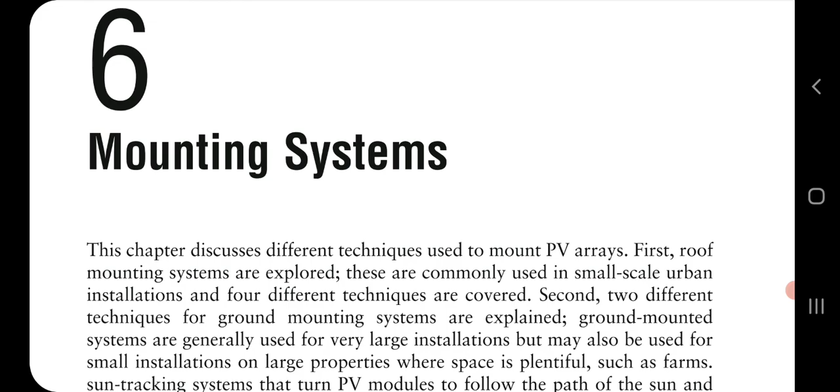The first mounting system is the roof mounting system. In the roof mounting system, particularly in houses or small buildings, or maybe some bigger buildings also, it is mounted on the roof.

The second is the ground mounted system, where the installation of a PV array is in large areas, like fields, on the ground, or at a farmhouse.

So the installation should be done well, because the power efficiency is affected due to the installation or improper mounting. You have to suitably check which is the best option, and also consider the safety issues around that. There are many things to consider, so the local installation conditions have to be taken into account.

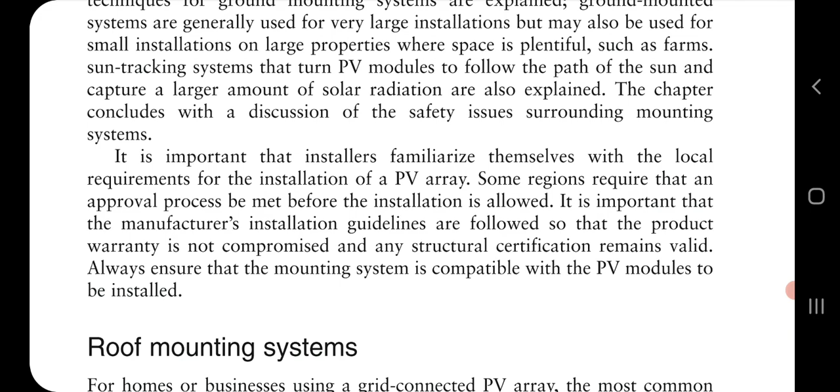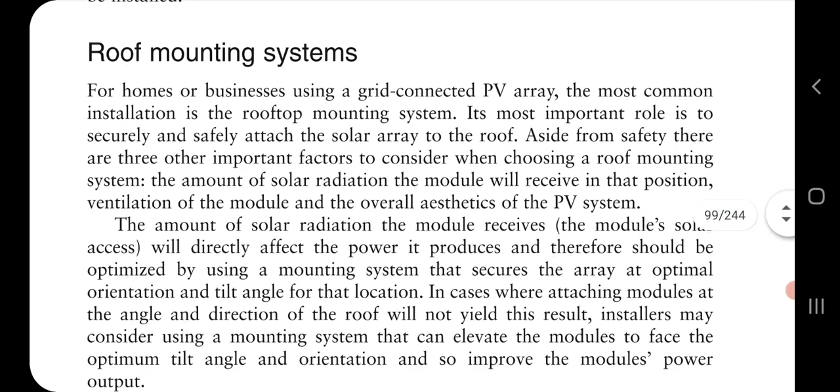We have to consider the specification or manual given by the vendor, and check which installation can be done, whether it is roof mounted or ground mounted. In this roof mounting system, it particularly happens in houses or small businesses where the building is used for installation.

But a lot of care has to be taken when you install the PV arrays above the roof. You have to see that the gap between the roof and the PV module should be more, because when heat falls on the PV arrays or module, it also generates heat, and the temperature nearby that area increases.

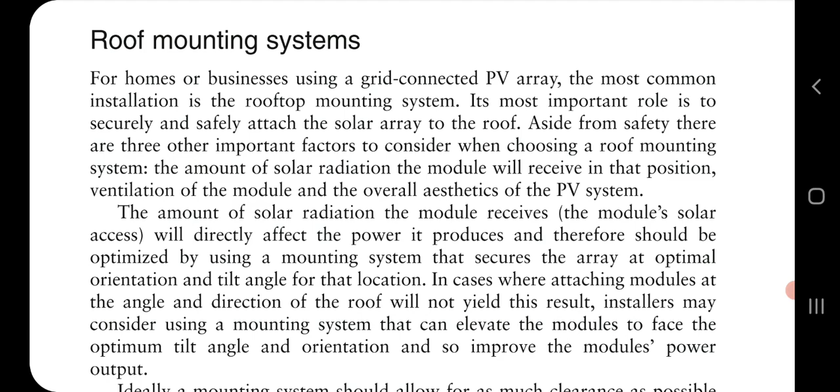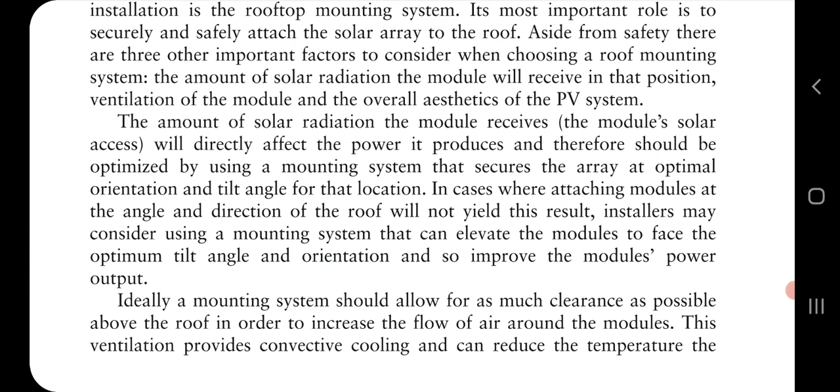So when the temperature increases, the power efficiency decreases. If there is proper or good ventilation, and air is flowing and removing the heat, then the efficiency increases. There are many methods for doing this, and the installation guide or manual should be considered.

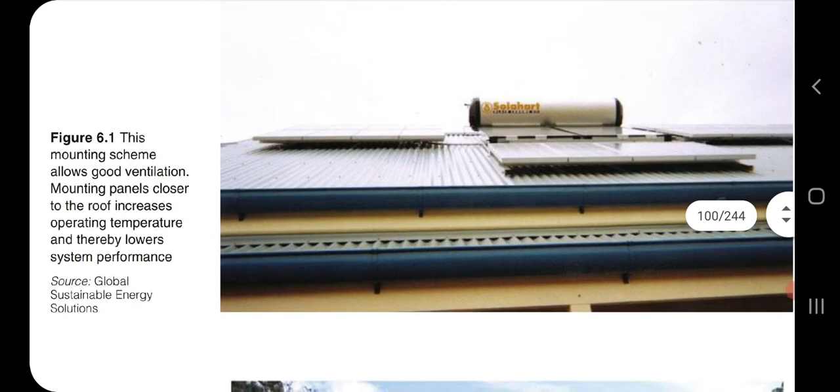Now, if you see this diagram, this shows good ventilation. Air can pass through the modules, and when air passes through the module, it removes the heat, so the efficiency increases and the life of the PV module also increases.

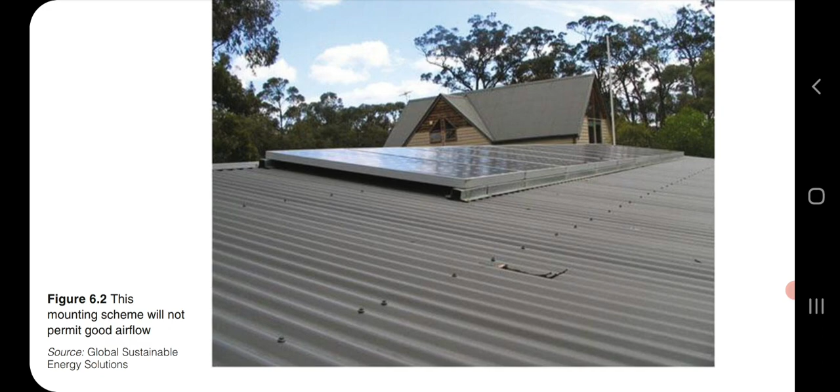But if you see here, it is quite different. This mounting scheme does not permit the flow of air, so it damages the life of the PV modules and decreases its efficiency. So it has to be installed properly, such that ventilation is present, heat is removed, and thus it increases the total performance.

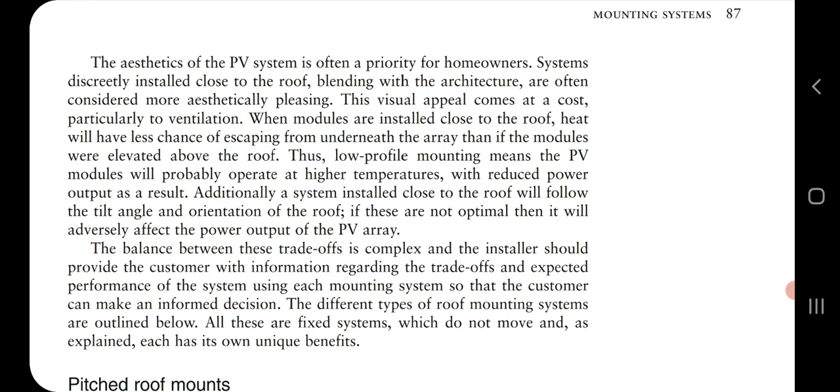Another method shown here is the pitch roof mounting. In this pitch roof mounting, the PV module or array is installed above the roof. It is easy and relatively inexpensive, with the attachment done above the roof, and there are many methods for this.

A horizontal railing system is used, along with a bracket, and the module is placed on the railing using a module clamp. By using this module clamp, the PV module will be above the roof level.

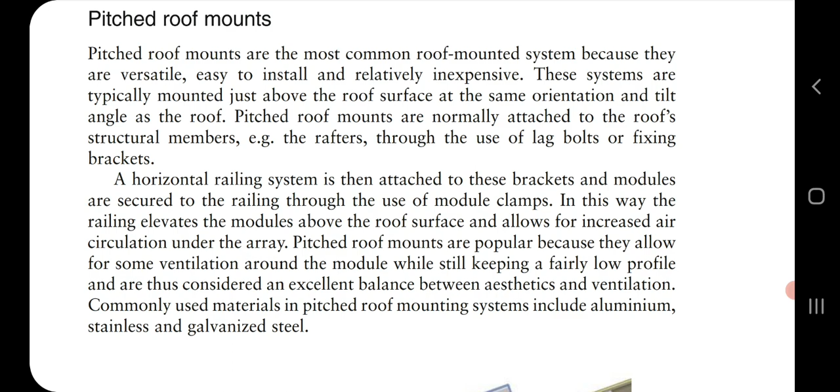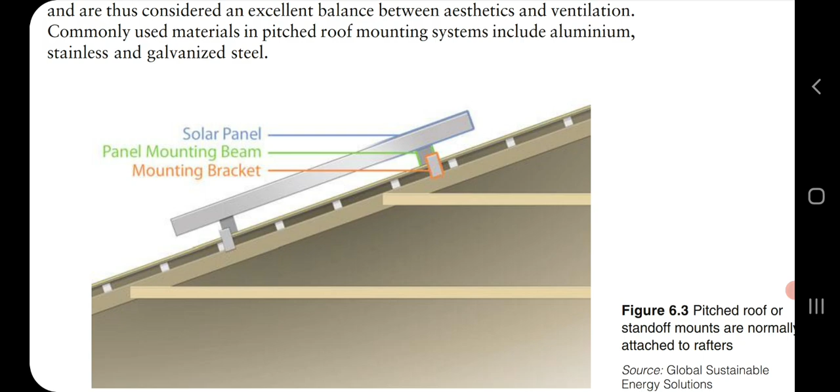You can see this one in this method - it will be above the roof level. When it goes above the roof level, air can easily pass through the solar panel, providing ventilation and allowing air to flow through the panel, which removes the heat. This is a very useful method.

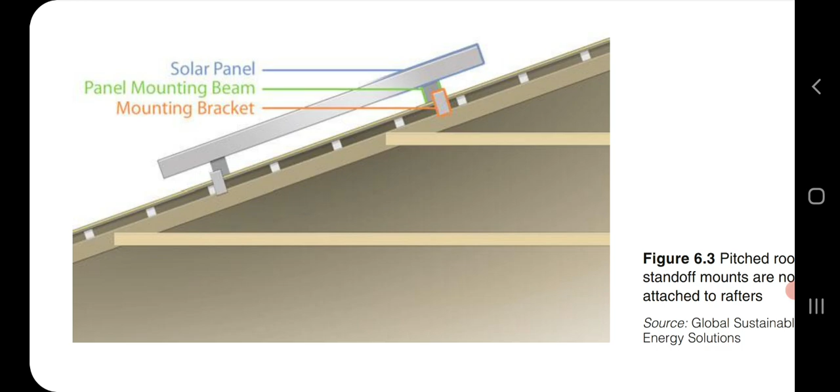You can see this panel here - above the railing, the module clamping is done, and you can see the gap between the roof and the panel. This is another method, using a clamp - a module clamp - above which the panel is installed.

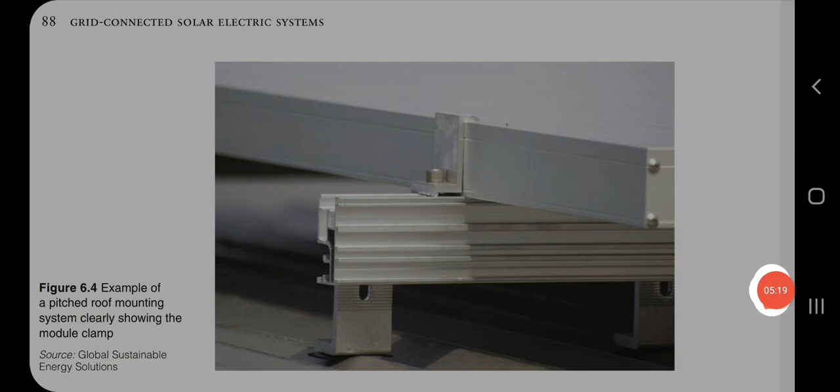In this one, pitch roof mounting for tilted roof. You see there are different types of roofs. One is a flat roof or horizontal roof, some roofs are tilted, some are metal type. So different roofs are there, and the installation becomes very difficult because the PV module installation panel will be same for everyone, but the accessories used to install it go on changing, or it depends upon the manufacturer. It varies in design and connecting.

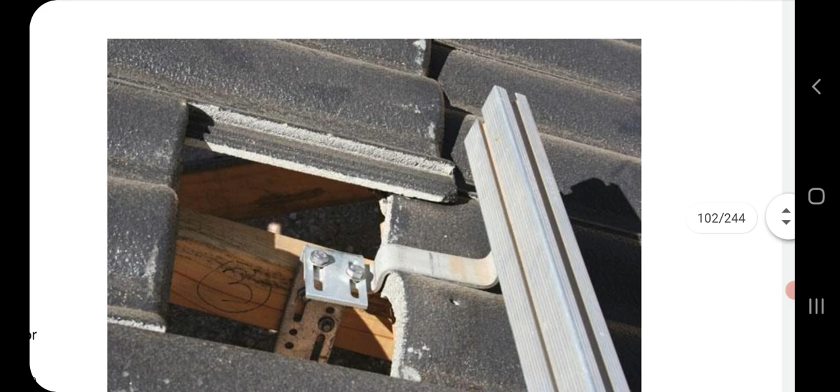For example, if you see this one particularly tilted, this is a complete tilted roof. For the tilted roof, a different type of accessories or modules are used which can be fixed. We have to see that when we are installing, particularly the tiles above the roof should not break, and it should be easily accessible.

Pitched roof mount for metal roof. When we have a metal roof, that time it is very important care should be taken. It is the most risky one. With a metal roof, when you are connecting, particularly the wire has to be taken care of. If any wire comes in contact with the metal roof, then it causes a lot of problems. So it has to be taken care of. The wire should not come in contact.

And when you are connecting two dissimilar metals or clamps of the PV arrays, and when you are installing on the roof, you should check that between the two dissimilar materials, something should be used that does not cause any corrosion. If corrosion happens, it damages the PV arrays as well as the roof. So corrosion should be avoided or prevented by using a rubber separator between the two dissimilar materials. When you use rubber between two dissimilar materials, corrosion can be avoided.

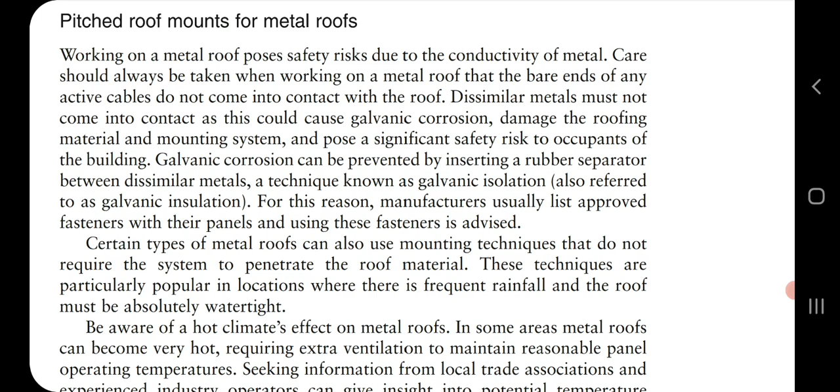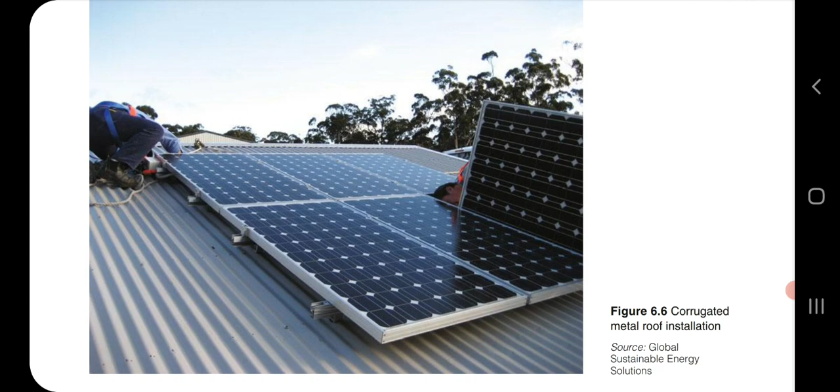You can see this one, if you are seeing this, the roof is a metal roof, and PV modules are installed above the metal roof. So a lot of precaution is taken between the clamps and the roof. Rubber is used to avoid corrosion.

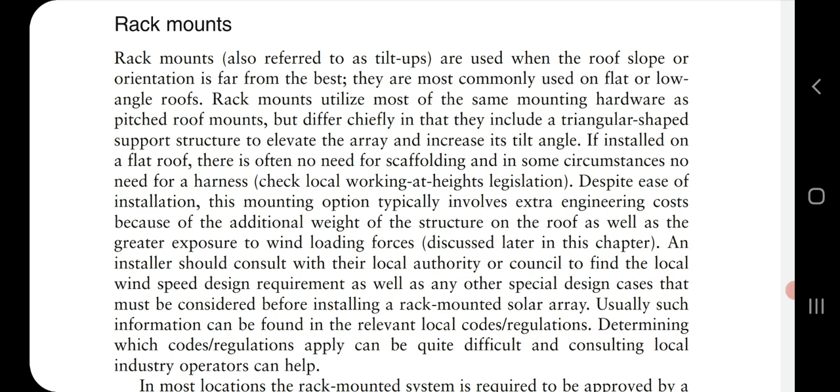The next is the rack mounted. It is very important. It is a triangular shape. If you can see this one, it is made up of a triangular shape. It is rack mounted, and here a separate arrangement has to be designed for the PV module.

In this one, what happens is this has to be very carefully done, and particularly the wind velocity has to be considered, because if the wind is more, it will remove the PV modules. So for designing this one, care has to be taken that wind velocity has to be properly studied, and it has to be designed accordingly.

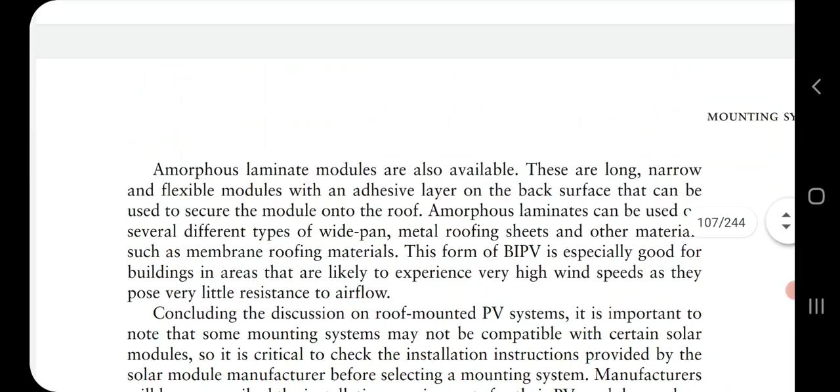The next method, which is very important and is now used daily as a technology everywhere in new systems, is the building integrated photovoltaic system. It is becoming very popular and is used by many buildings, designed in such a way that you can see this particularly as a building integrated system.

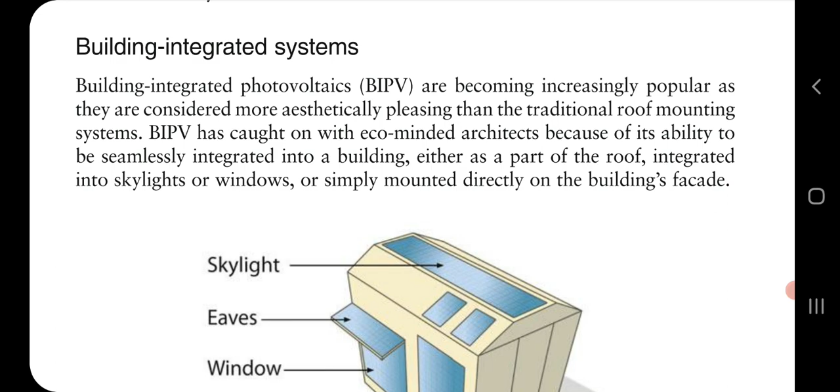In a building, particularly the roof is made up of solar arrays. The tiles you get for the roof consist of solar array tiles which are installed on the roof. Some are installed at the window panels, and some are installed at the door also. So they are integrating all these things into the building itself.

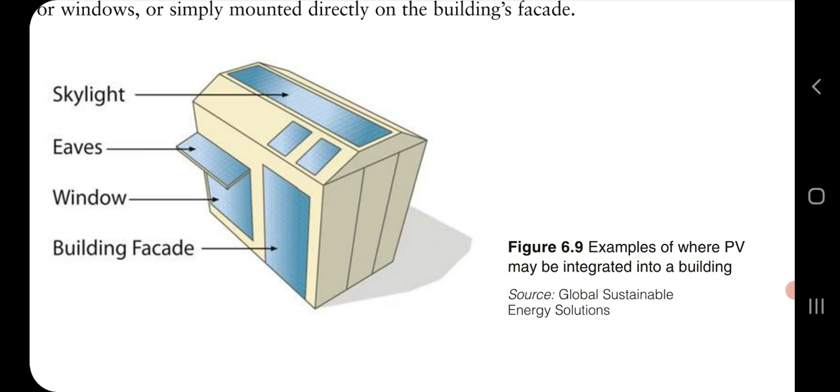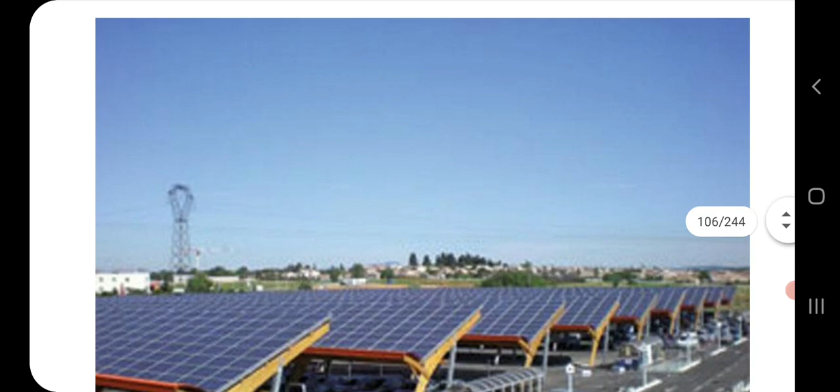So it is made up of tiles. If you can see this particularly, it is made up of tiles. Here you can see the roof, but this solar array is directly installed in the parking area.

And even here, these are the tiles, particularly solar tiles on the complete roof, placed above on the roof side. So there's no problem for ventilation, and any wind-causing problem is also reduced.

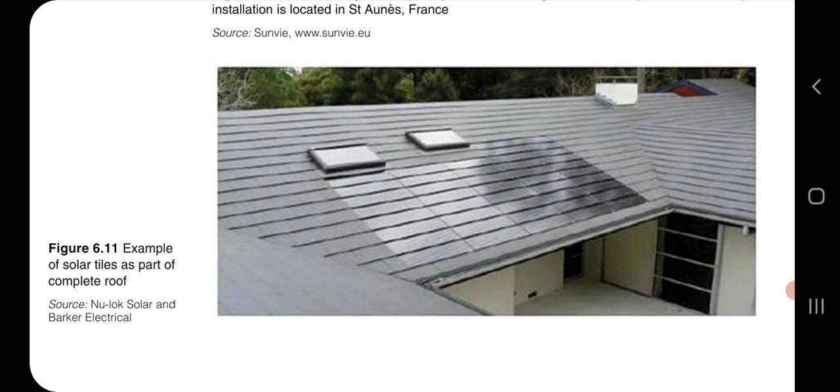Here also you can see tiles lamination, called amorphous laminating, installed on metal roofing. That time the roof is installed properly. That tile is amorphous, made up of one material, coming in the tile itself. No need of putting a slab - if you put that one, it starts producing and generating electricity.

Ground mounting system is very important, and it is used where there is plenty of land available. It is used for large production also. One advantage is there: when you place it on the ground, you get a lot of energy - more energy can be obtained from this if placed on the ground.

There is no requirement for tiltation also. If you directly place it on the ground, it absorbs the sun rays depending upon the movement of the sun, and easily absorbs the radiation. Whereas in the roof system, it is quite different tiltation, and the efficiency or power of the solar reduces there.

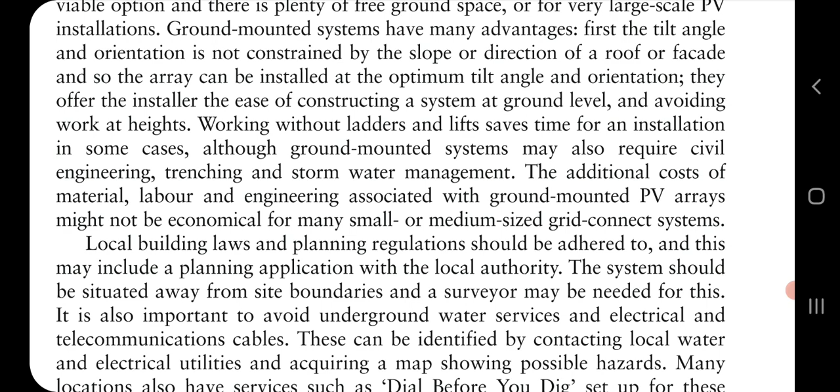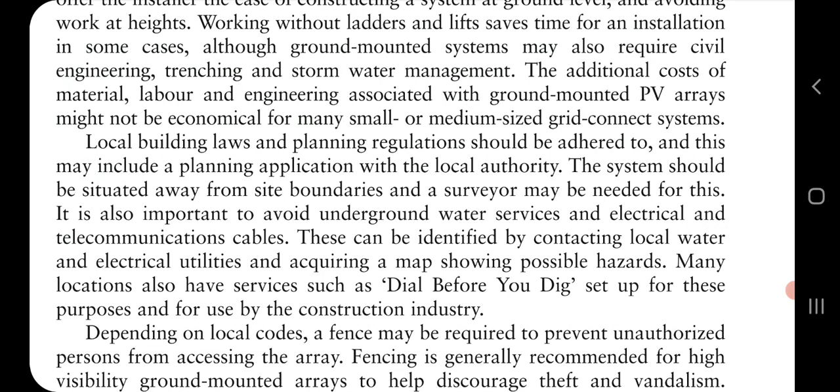For this, particularly there should not be any electrical cable or telecommunication cable, or water service pipe passing through that particular area. You have to check for this, and the land should be clear from all those things. After that, fencing should be done, a person to take care should be appointed, and cameras also have to be installed. So when it comes to the ground mounting system, the cost increases.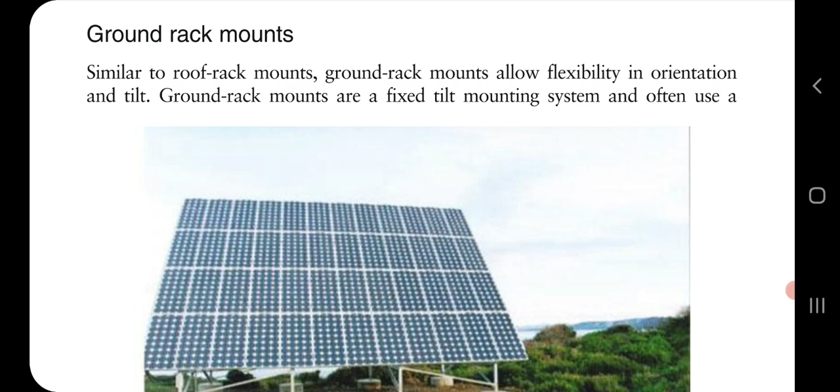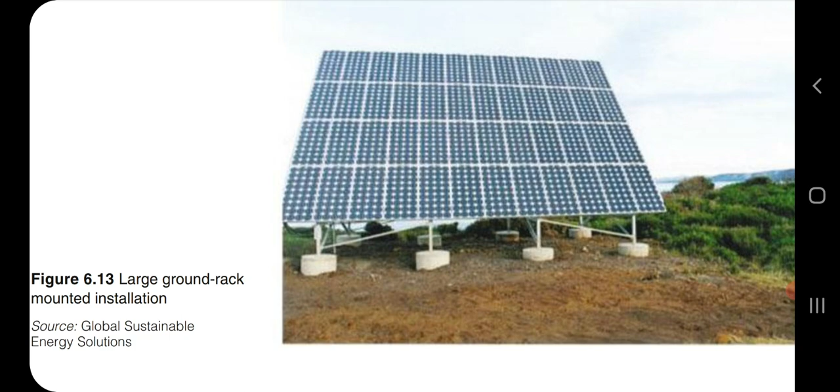The next method is a ground rack mounting method. This allows flexibility in orientation and tilting. In this method, different types of modules and accessories require foundations, so civil work of foundation has to be done. Upon that, many accessories come, and then it is installed properly, ensuring the installation is done correctly.

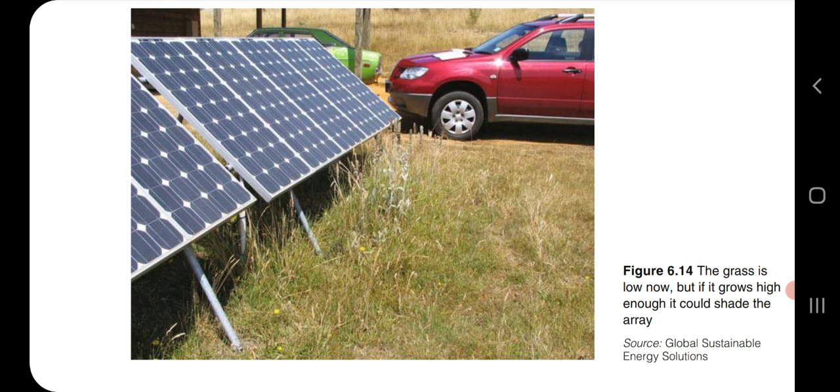Here you can see another installation. In this installation, if the grass is low, then it is good. If it increases, then it affects the efficiency also.

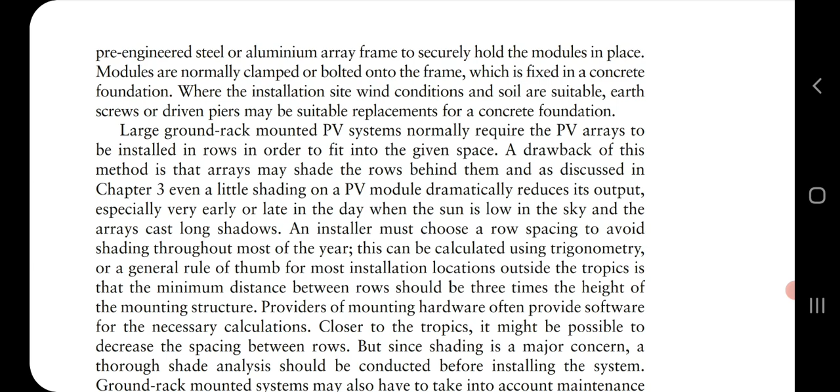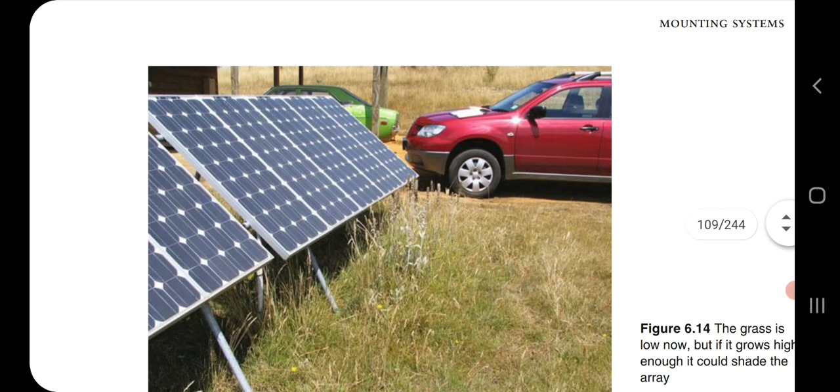So an aluminum array frame is made, mounted on the foundation. Clamps, nut bolts, and other hardware are used for this. You have to be very careful regarding the installation of these particular modules. When you are tilting the module, a shade will fall on another module, so there should be a certain distance between the two modules when installing. Care has to be taken that shade should not fall on that one, and it should be properly designed. A gap has to be maintained properly, and maintenance has to be done at the right time.

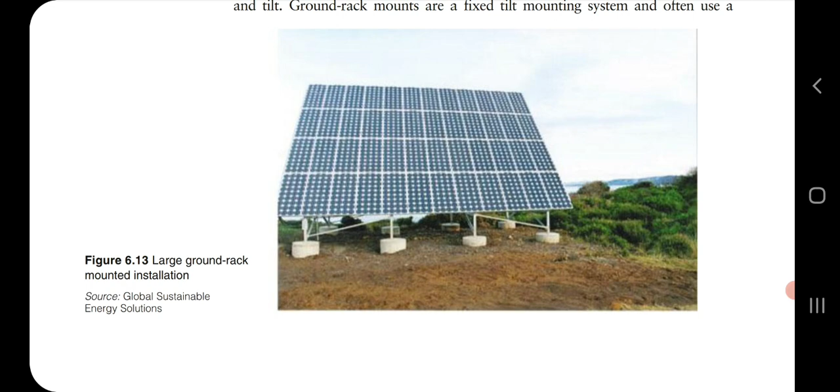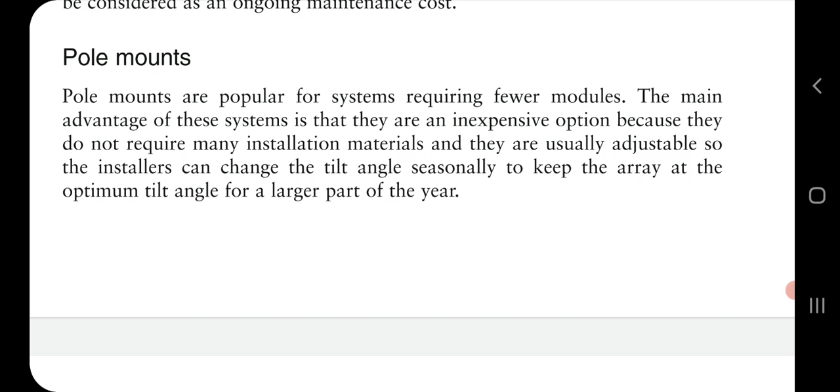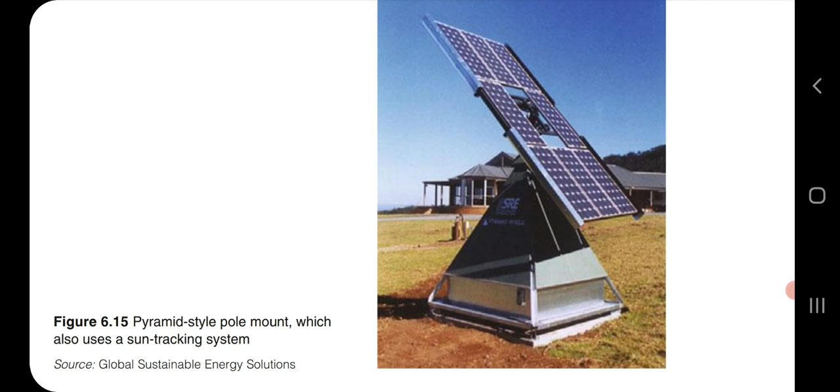Sun tracking system means the movement takes place; it can rotate in any direction. In the sun tracking system, it consists of a mechanism part which moves along with the direction of the sun, and it absorbs more power over a long period of time. It is also very expensive, and it uses a tracking system with sensors and a computer which calculates the position of the sun and moves with the help of a motor and gear.

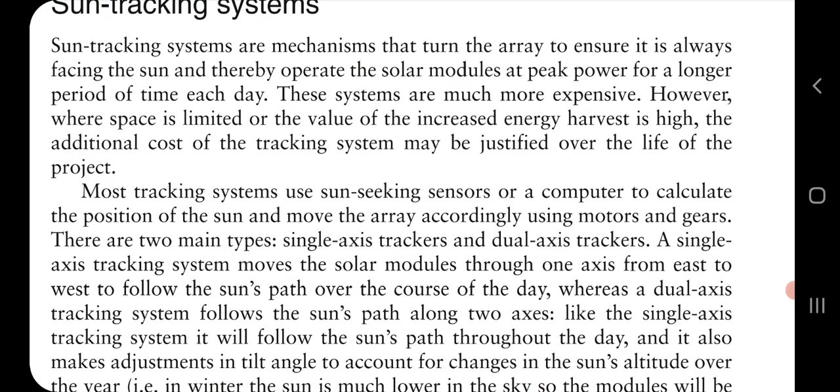There are mainly two types: single axis tracker and dual axis tracker. In the single axis tracker, the solar module moves from east to west in the path of the sun, whereas a dual axis tracker follows the sun's path along two axes. It moves from east to west, but also changes its altitude, changing its direction depending upon the movement of the sun in different seasons.

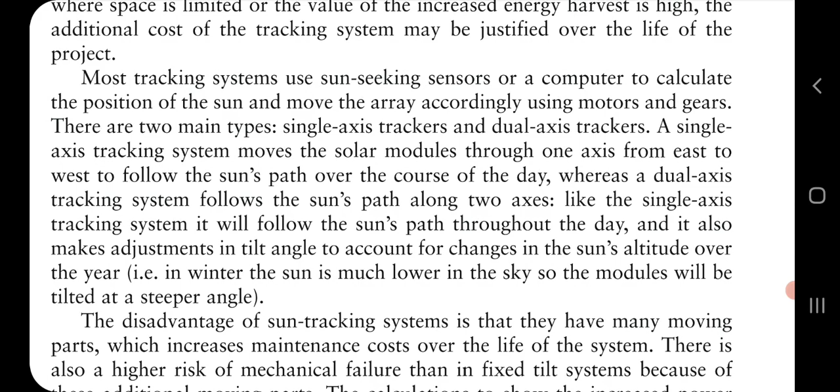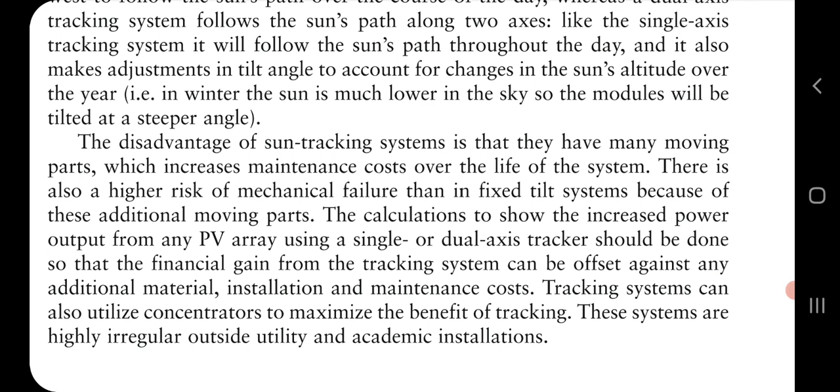The main disadvantage of this system is that it has many moving parts. The maintenance cost also changes here, and the maintenance becomes more, and it is risky that mechanical failure takes place.

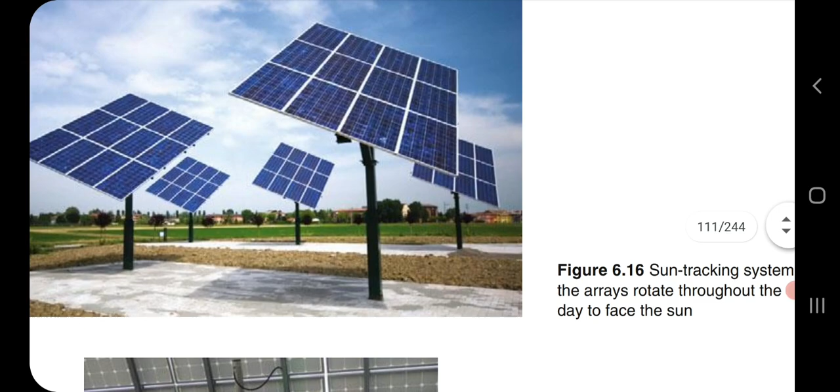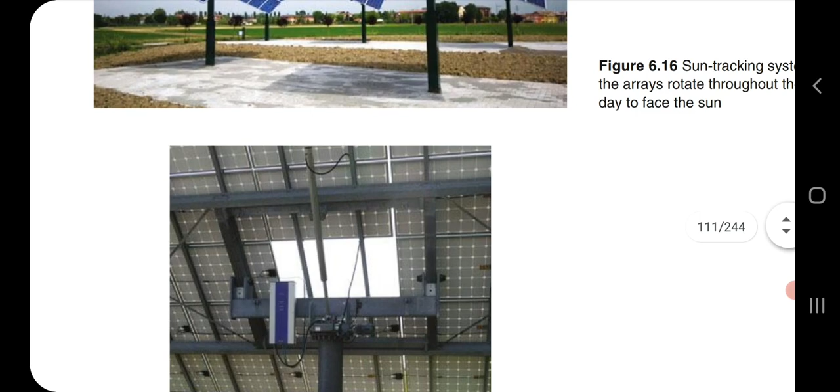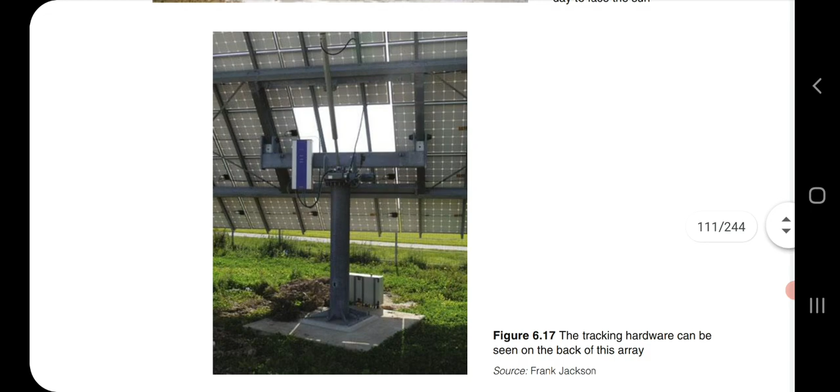There you can see the sun tracking system. The array rotates throughout the day to face the sun; the movement takes place as per the direction of the sun. This tracking hardware can be seen on the back side of the array. You can see the back side of the array, particularly this back side.

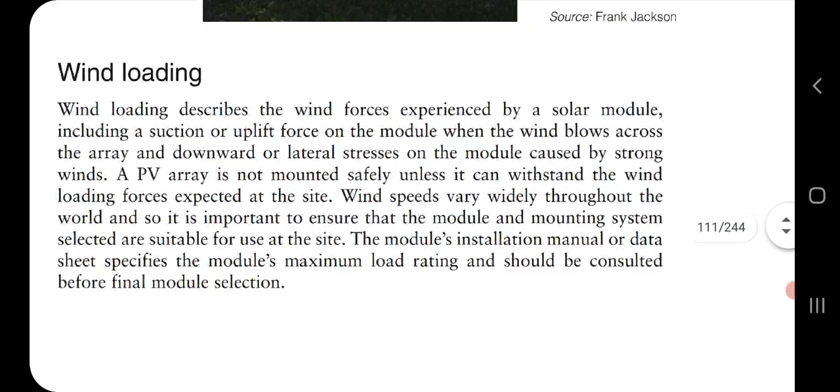Wind load is very important. Wherever you are installing a PV array or module, the wind velocity and wind force have to be measured properly. When there is less or more wind, it uplifts the module, lifting it upward, or makes a lateral stress on the module. So strong wind plays a very important role, and the designing of the PV module accessory should be very good, able to withstand it throughout the year.

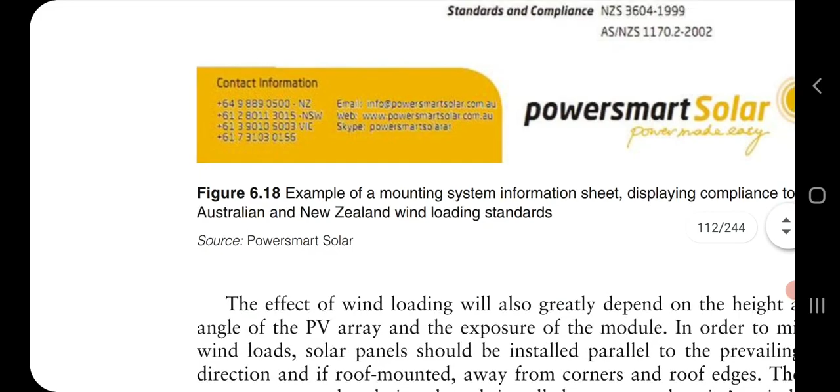So data has to be collected properly regarding the wind, and based on that, the panel has to be installed properly, with designing done properly, in order to minimize the wind load.